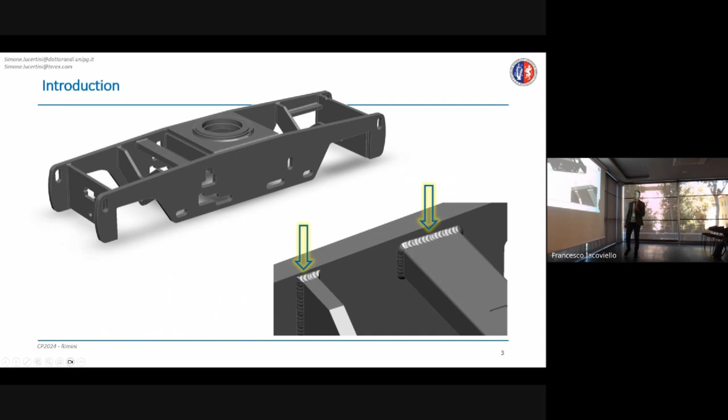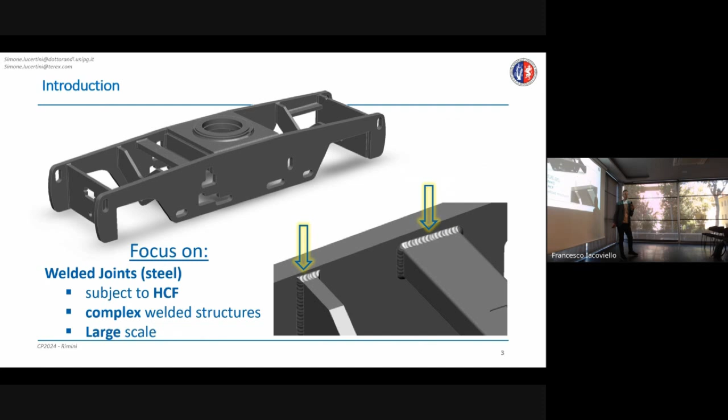Today we're going to talk and focus about welded joints for steel that are subject to high cycle fatigue, for complex welded structures in large scale models, and that's the key. So it's a sort of big data analysis because it changes the way we analyze welded joints. We have a dual vision of the welded joint analysis.

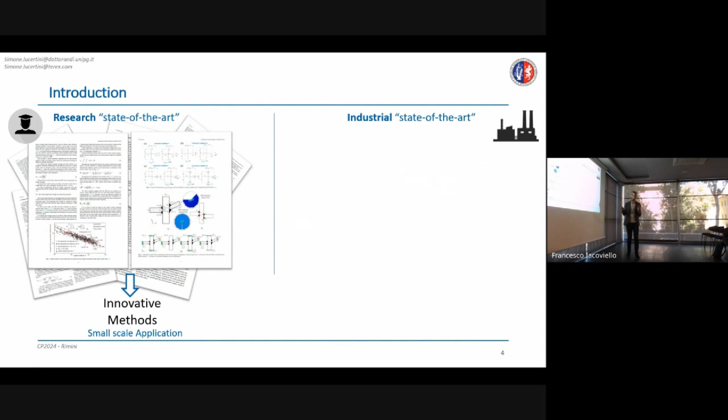One is about research state of the art, one is about industrial state of the art. From the research standpoint, we have a lot of interesting theories and applications. Those are innovative methods, very promising and sometimes very, very accurate compared to physical tests, but usually adapted for small scale application or simple application.

On the other hand, industries still use the regulations. For example, in our field, the EN 13001, but you might know Eurocode 3, or the British standard 7608. Those use the nominal stress method or the hotspot method, which are very consolidated and work well, and they are applicable at large scale. They are easy to apply to large numbers of joints. But your joint has to fit inside a classification, so the shape and geometrical features have to match the one represented by the classes.

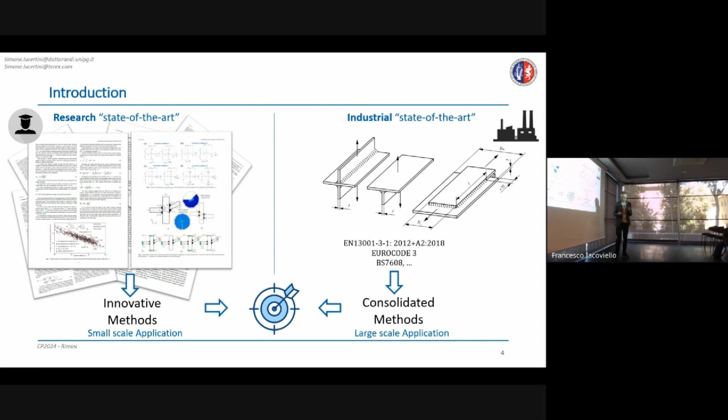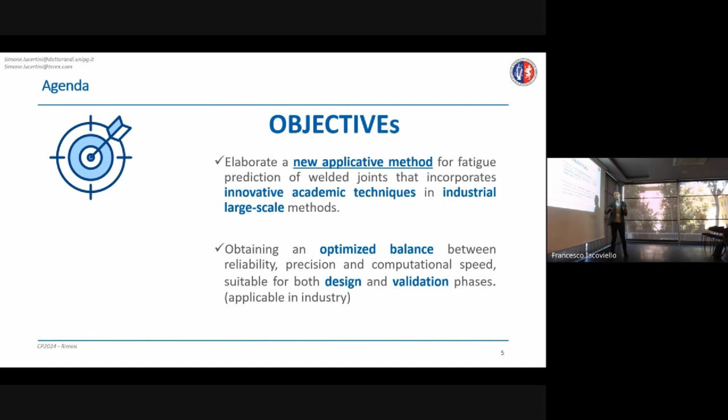And so the loads and the direction of the load. So we are trying to merge those two worlds inside a single method that can provide the benefits of both. The objective is to elaborate a new applicative method for fatigue prediction of welded joints, that incorporates these new techniques from research into industrial large-scale models. As a boundary, we want to obtain an optimized balance between reliability, accuracy and precision of our results, and on the other hand, computational speed. So we can use this method both for design and validation stages.

So briefly, the steps we're going to follow: go for a reference theory of the method we are using, introduce this method and its calibration. Then I'll show some test cases to validate it, the operational workflow for the designer who is going to use this tool in the field, and some results together.

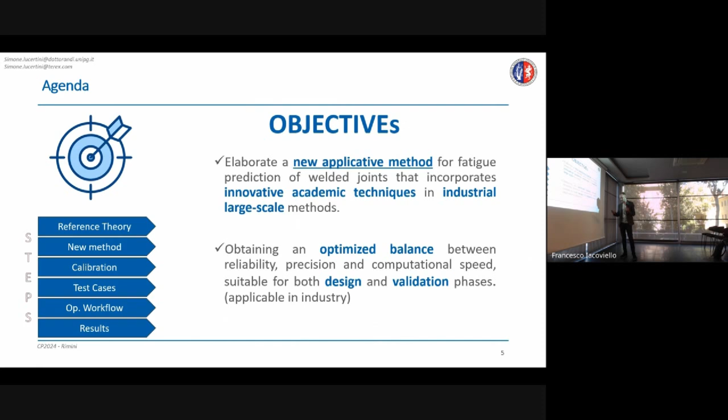For the theory, one of the most interesting methods that exists and has recently been developed is the average strain energy density criteria, or ASED. It's an energetic local approach; this is an example of a welded joint seen in plane as slides. In this small radius, this criteria tells us to gather the energy, or better, the energy density on this area, which is, of course, a volume, the third dimension.

R0 has a complex formulation, but for the nominal welded joint in this case, the angle is known. R0 is just a metric of the material; for steel, the value is 0.28 millimeters. So gathering the strain energy density, the average strain energy density in this area, and comparing it to a limit value, allows us to predict crack initiation.

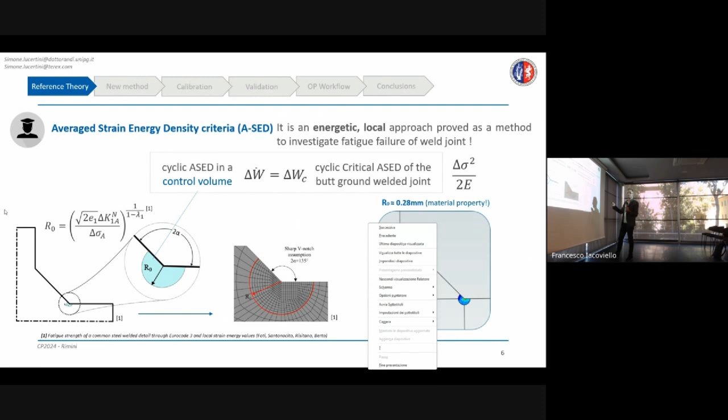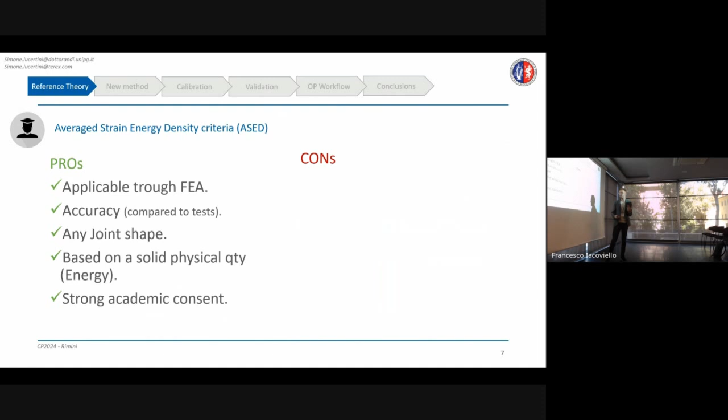This method has a lot of pros. It's applicable for FEA, which is good for companies. Its accuracy has been proven by hundreds of physical tests. It can virtually describe any joint shape, and it's based on a solid physical quantity, the energy density, so it has a strong academic consent. But for application, it's complicated. It requires an extra fine mesh on that small volume, so it's usable mostly from a validation viewpoint.

In all, it takes into account brick elements, so solid mesh elements, and it requires a high computational effort due to the high number of elements, and also a dedicated, intense pre-processing to create the volume and the mesh refinement required. As well, the post-processing is not that simple either.

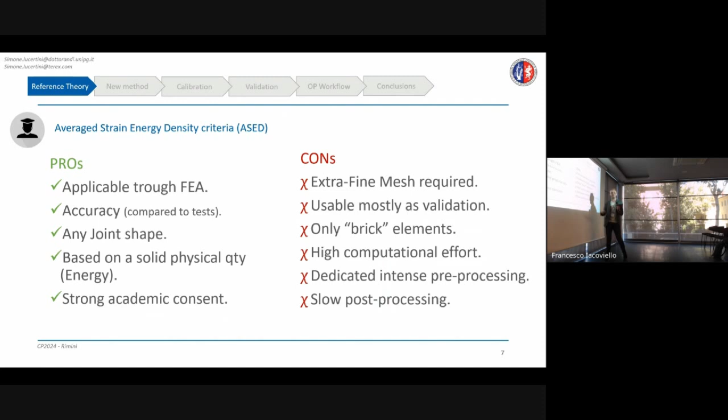On the other hand, for industry application, one of the methods that works and is incorporated in some commercial software is the structural stresses from nodal loads. You might find it with different names, so it's sometimes difficult to find papers about that. But generally, this starts with a shell representation of your welded joint. And if we want to analyze the stresses on the weld line, this is a mesh-insensitive approach, so it requires just a coarse mesh, a very simple model.

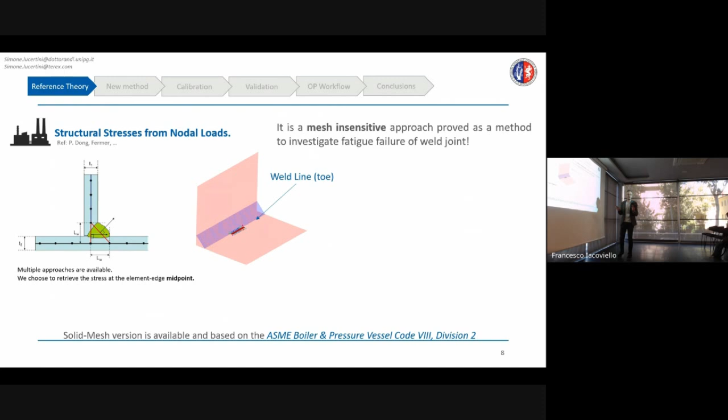So from these forces here that any FEA solver can retrieve, it is possible to distribute them based on the length of each specific element edge. With this formula, basically you can retrieve a distributed load, which can be a force or a moment, and retrieve the stress at the weld toe as a combination of a pure tension or compression component plus a bending component.

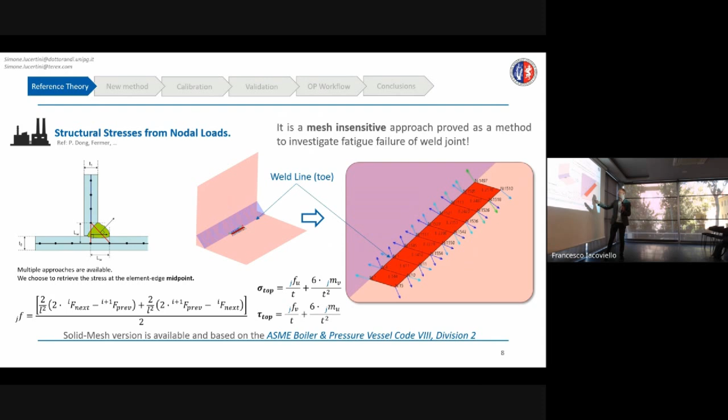These approaches have a lot of pros, so it's again applicable for FEA. It's useful for validation and design for brick and shell elements. It does not require pre-processing. In fact, these commercial software are post-processors, so it takes low computational effort, so you can calculate hundreds of joints in a few minutes. So it's accepted by industries and in automotive.

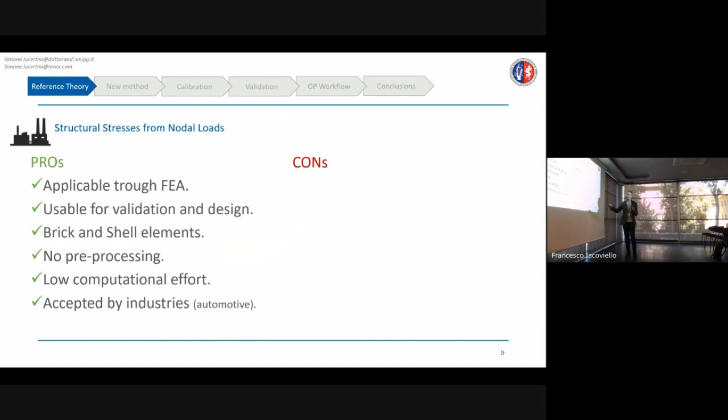As a concept, as an approximation, it takes into account only some loads. The welding is simplified.

We want to merge those two methods together. So this is a core section of an L-shaped joint. If you want to analyze what happens here at this weld toe, by applying different forces and moments of the loads in the near and far section, having this boundary condition constraint...

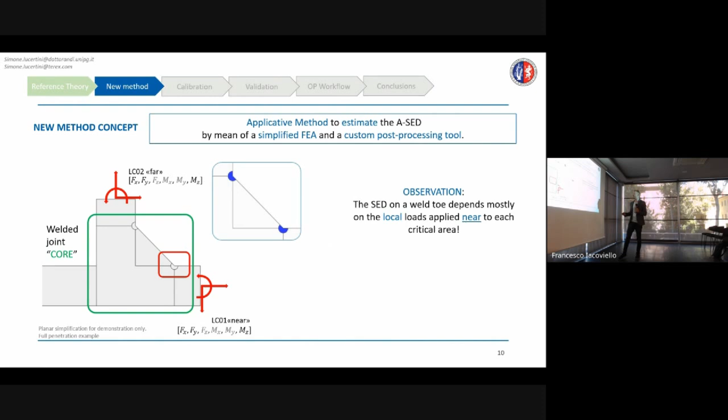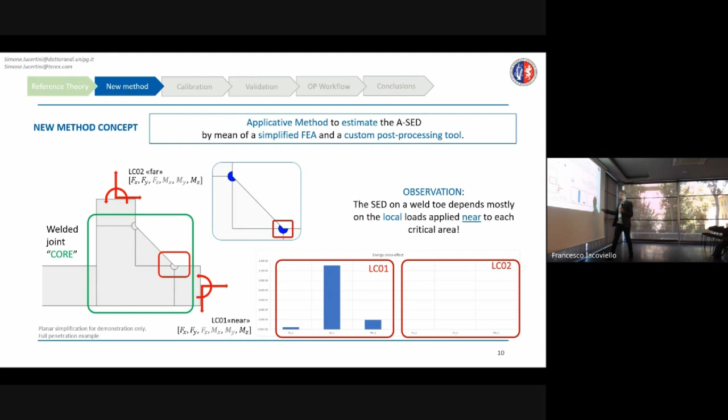We observe that basically the strain energy density here depends only on this area close to this section, and it's independent from the other. This means that we can somehow correlate the local loads, forces, and moments to the strain energy density. So it's something that we can do.

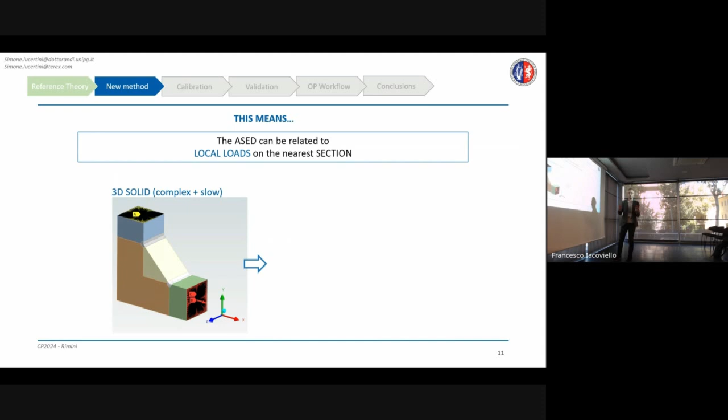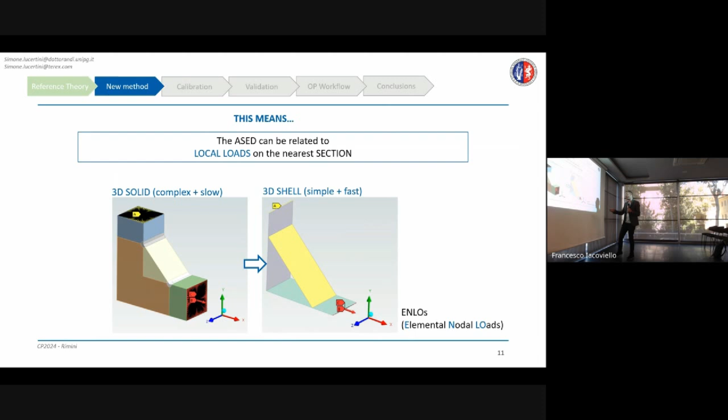So the idea is to convert this complicated model on your left, which is just a section where you can imagine a more complicated welded joint with this pre-processing to create the volume and split the solid to have a better mesh, to the model on the right, which is a very simplified model using shells and applying and considering the loads within the weld. So, of course, in the shells, you don't have information on the strain energy density in that area. So it is required to calibrate this model to correlate different kinds of geometries and different types of loads.

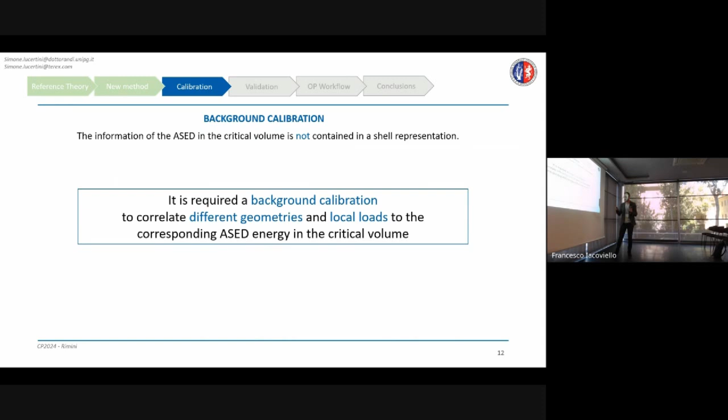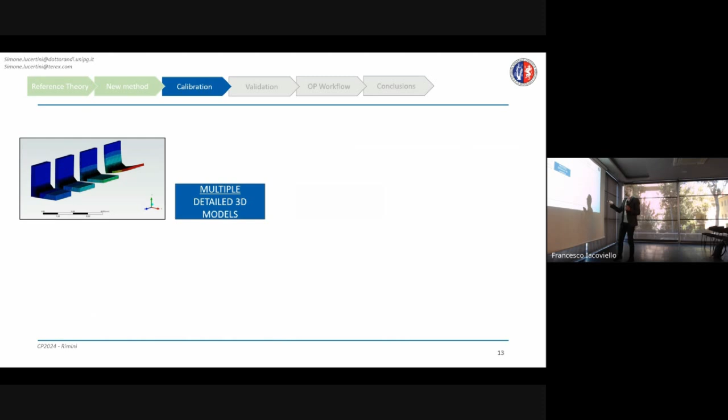So how do we calibrate? For example, for an L-shaped joint, the strain energy density method that we consider now as a reference, the full model requires changing the geometry every time we change, for example, the thickness of the connected plate. So we have to change the geometry, the mesh, and run the entire analysis. Then we get directly the strain energy density from that.

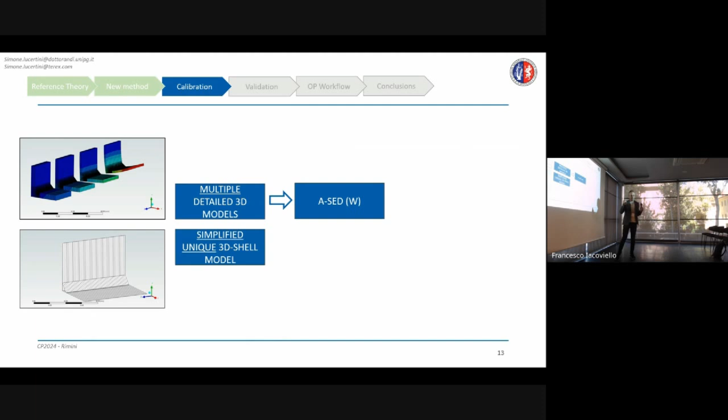In the proposed model, accepting a small error, we use only one shell model for all the thicknesses, since the thickness of the plates is changed analytically. The small error is due to the fact that changing the thickness, we should correct the position of the weld toe a little bit, but we accept this error with the benefit of having a unique geometrical model describing multiple thicknesses. This model gives us forces and moments.

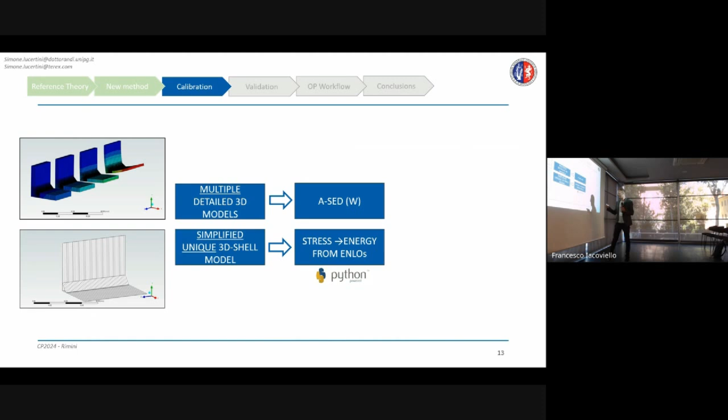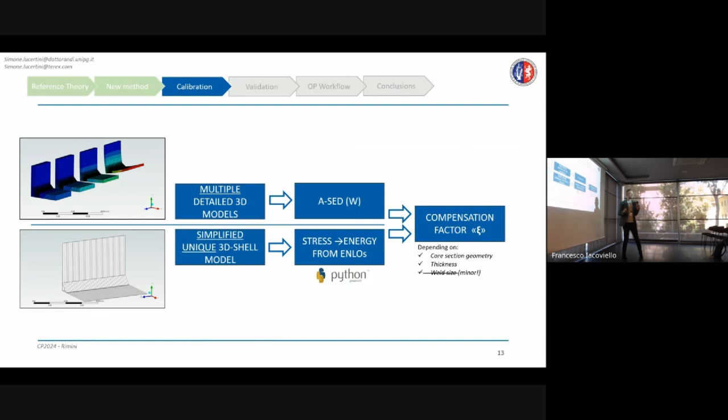So from that, we should use some other tools, in my case Python, to calculate the stresses from the loads and then estimate the energy. Of course, we are going to need a compensation factor ξ that will depend on the core section geometry and the thickness, while the weld size has just a minor influence on that.

That means that the reference model above, the full-scale model, and our proposed model below are connected together this way. So from the one above, splitting the weld path, we retrieve the strain energy density, which is not constant within the weld path, of course, and this is directly retrieved by FEA software. While again, from FEA software, we retrieve the nodal loads on the simplified model as just tables or numerical values, and then we process them.

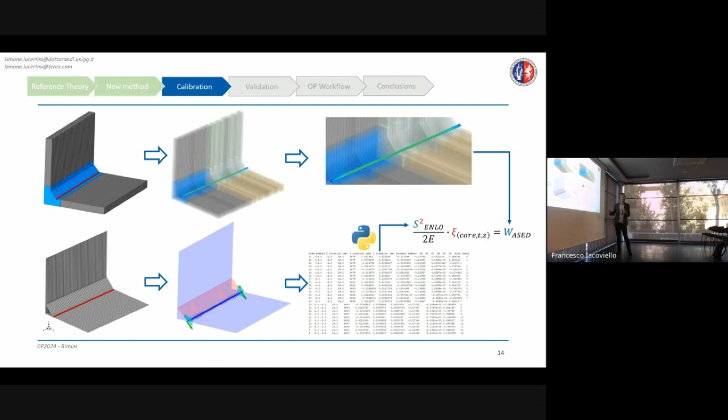Here it is the point. We cannot correlate directly the stresses to an energy. They have different units, they are different things. So we square the terms and divide it by two times the Young's modulus. That means that this has the unit of an energy, it's a pseudo-energy. Again, we need a compensation factor, but now we are comparing apples to apples.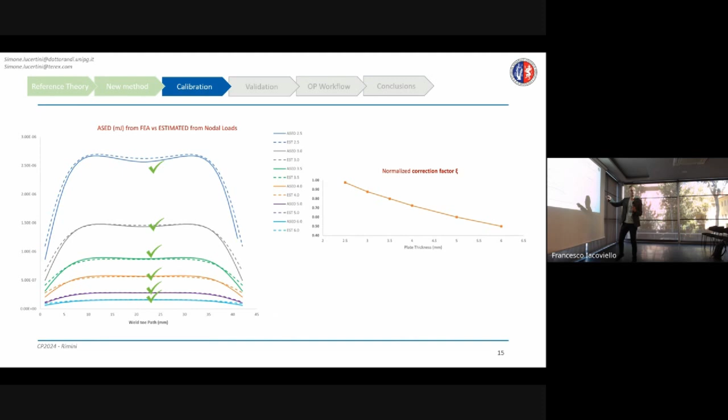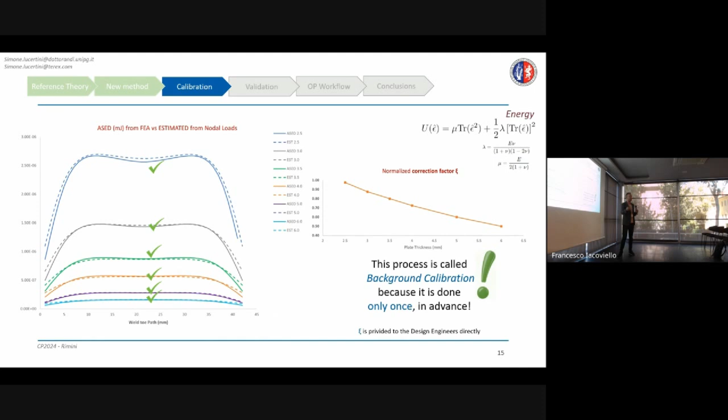We see a promising correlation, a good correlation between our prediction, including the edge effect and the mid-plane effect. So we can say that it is valuable as a comparison. This process is called background calibration because we obtain this curve which is provided to the design engineer, so it's not required to do this calibration for applying this method.

Validation - is this working? Well, it happens if we change the geometry, we apply to another joint with different shapes, boundary conditions, loads. So we applied, for example, to a tube welded on a square plate, and I'm presenting just a demonstration today, but we changed also the dimension of all the elements. We did an analysis of sensitivity.

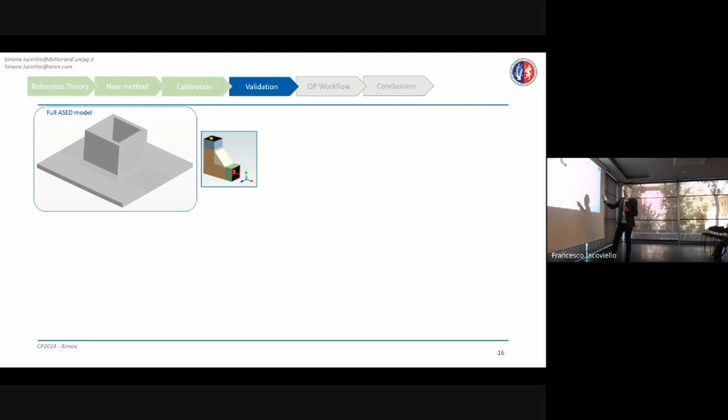So the full model above and the simplified model below with shells, applying the same compensation factor we saw before with completely different geometry - it was an L shape with bending moments. This is a completely different situation.

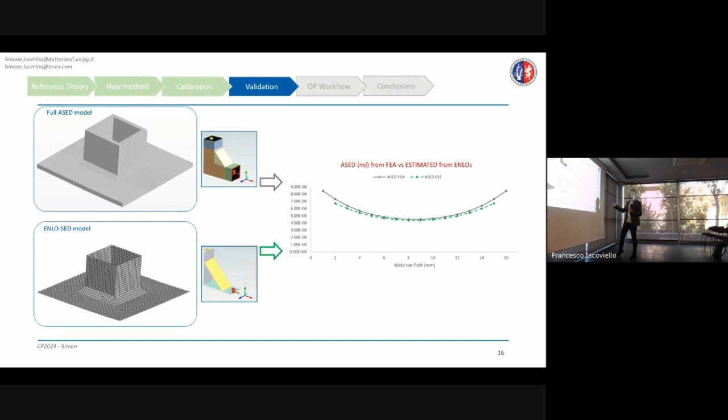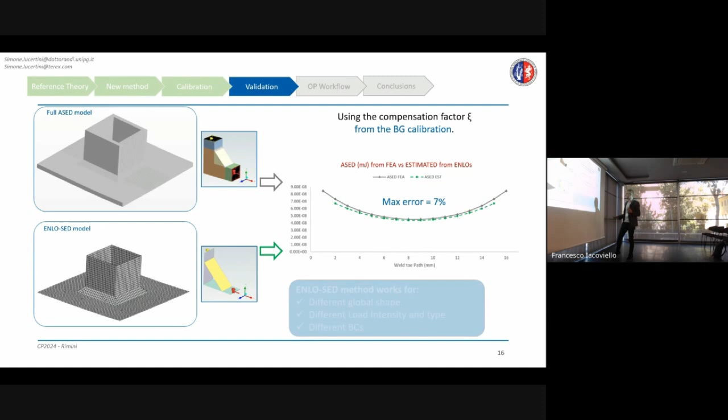We have a very strong correlation, especially in the middle, where the difference is very, very tiny, 2-3%. At the edges we have a little bit more error, but in the various files we have something which is within 7%, more or less, using the same coefficient from the calibration.

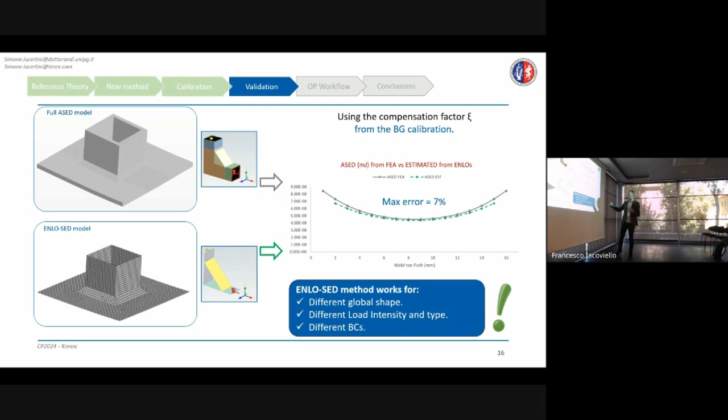So we change the global shape, we change the load type, intensity, and also the boundary condition, but the correlation seems promising, seems great. Operatively, how is it applicable in the industry?

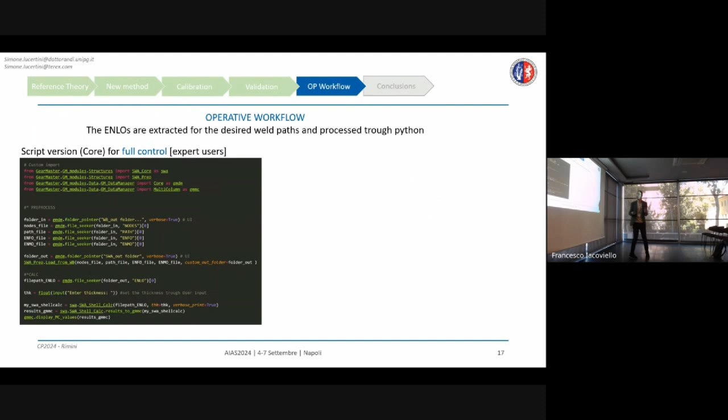Two ways, of course. The first one is just using the script for full control - in this case it's Python, as I said. Or I also included this same script inside a visual tool, so it's easier for non-expert users to set up a workflow and do their calculation without any coding or coding ability.

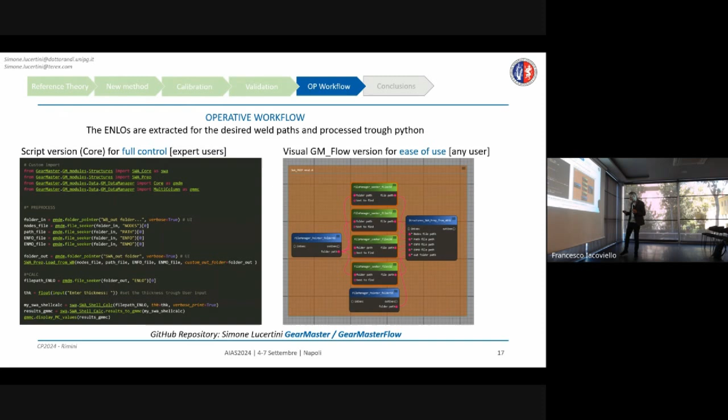This also has been included in the new package by ANSYS, which includes this library, PyDPF, that allows us to get the results from an ANSYS analysis or an RST file, get all the results we want, process the results as we want, and project those results onto a geometry. So we can also visualize our results over a geometry.

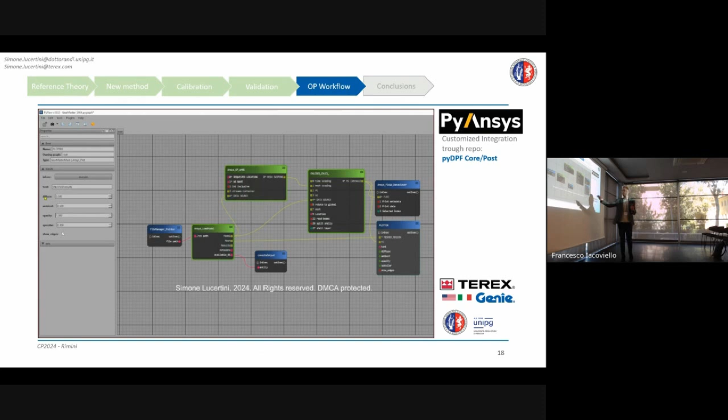This is just an example, but you can do that for a very complicated geometry - just for representation, for displaying and showing the results.

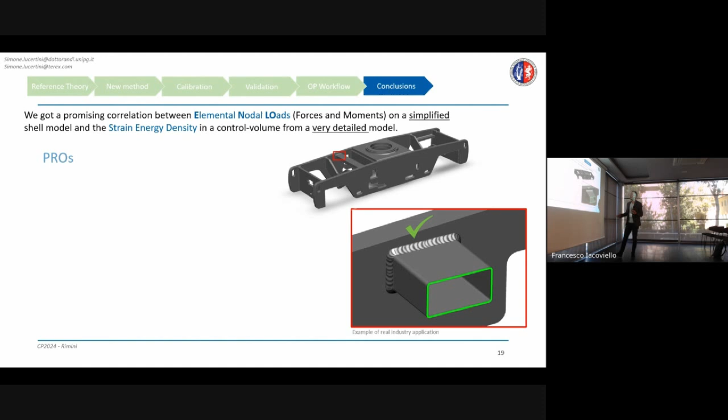Going to conclusion, so we got a promising correlation between the elemental nodal loads forces on simplified shell models and the full-scale 3D model for the strain energy density, obtaining a method that, if developed, could grant it applicable as FEA post-processing for industry.

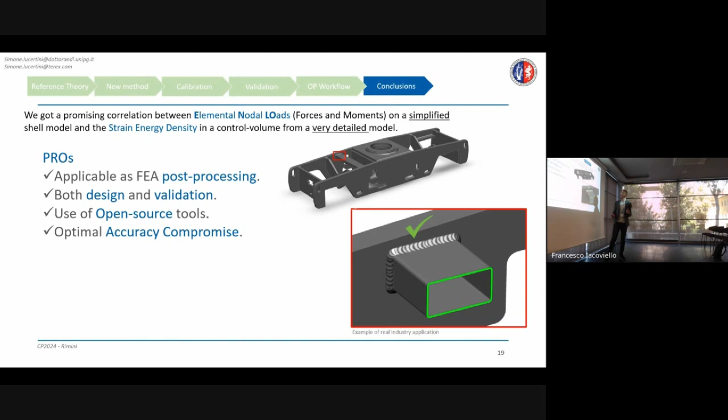It also works for design and validation. Design because it's easy to iterate with different thicknesses - the system is super fast. It uses open source tools like Python and other free libraries. It's a good compromise in terms of accuracy and power consumption and CPU consumption.

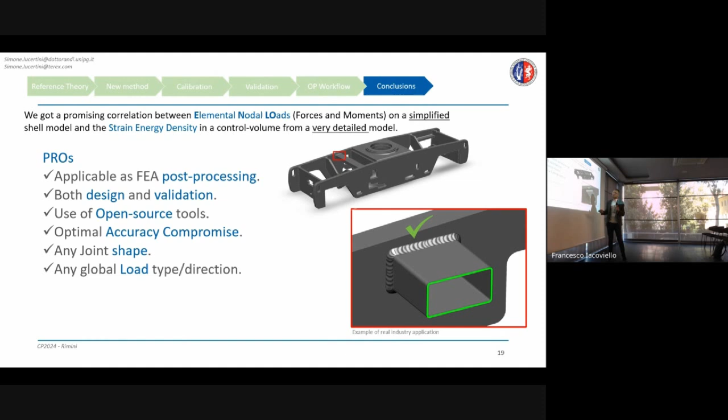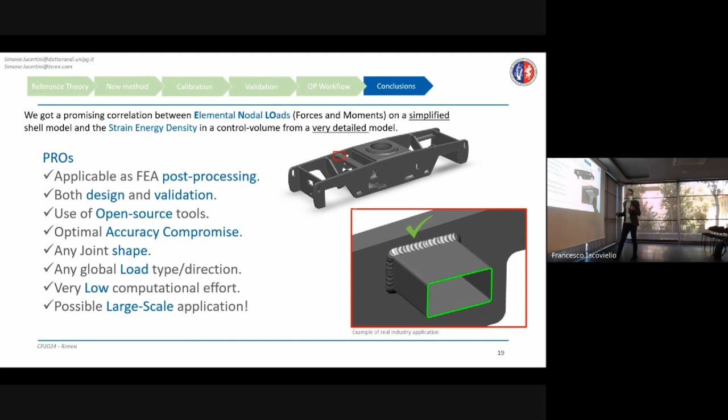It can virtually describe any joint shape, any global load type or direction, with very low computational effort. So it's possible to apply this method in large scale applications where you have hundreds of joints that you need to analyze in quick time.

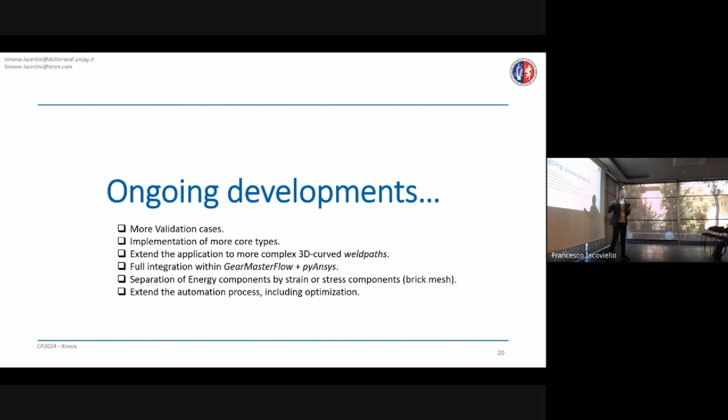Just 30 seconds on ongoing development. We want to test more validation cases and implement other joint types, extend the application to more complicated 3D weld paths, and continue integrating with pyAnsys and our library to have a seamless tool for the designer. Then separate the energy components for strain or stress to understand which component is most important for the energy, and extend it to include some automation and optimization to help the designers.